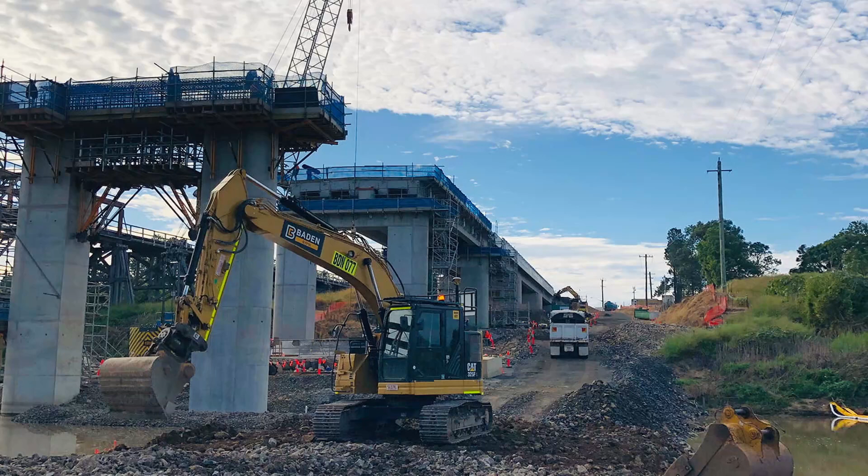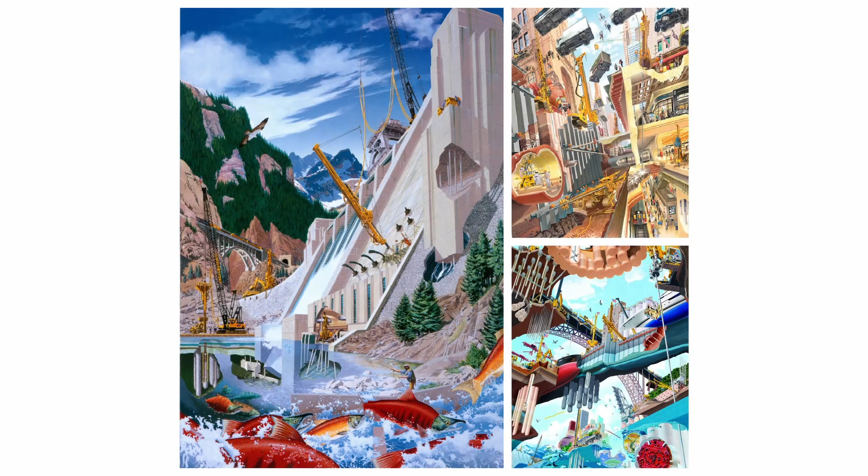As Terzaghi is said to have noted, there is no glory in foundations. Indeed, most of our work is buried. For example, everyone knows the Eiffel Tower in Paris, but very few know about its foundation.

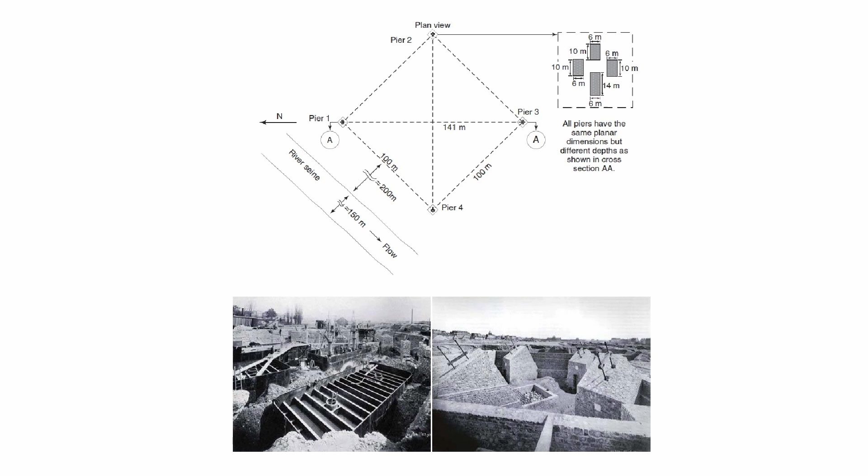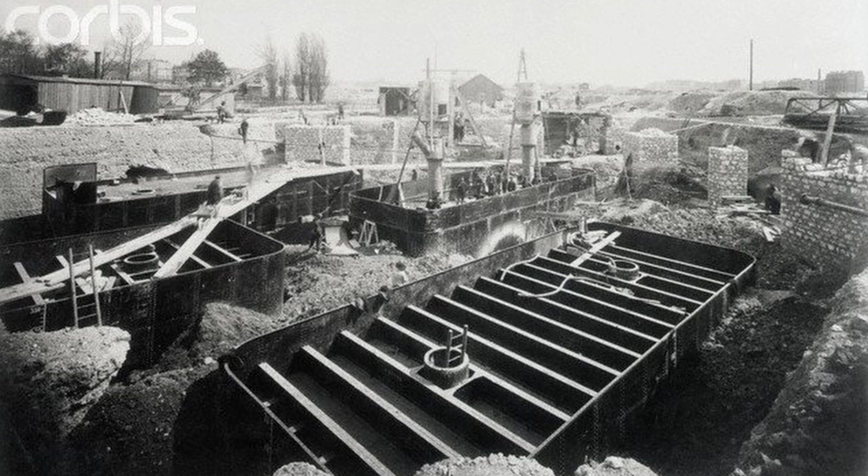The foundation was built by excavating down to the water level about 7 meters deep, but the soil at that depth was not strong enough to support the 100 meganewton weight of the tower, so digging continued. Because of the water coming from the River Seine, the deepening of the excavation had to be done using pressurized caissons, upside-down coffee cans, so that the air pressure could balance the water pressure and keep it out of the

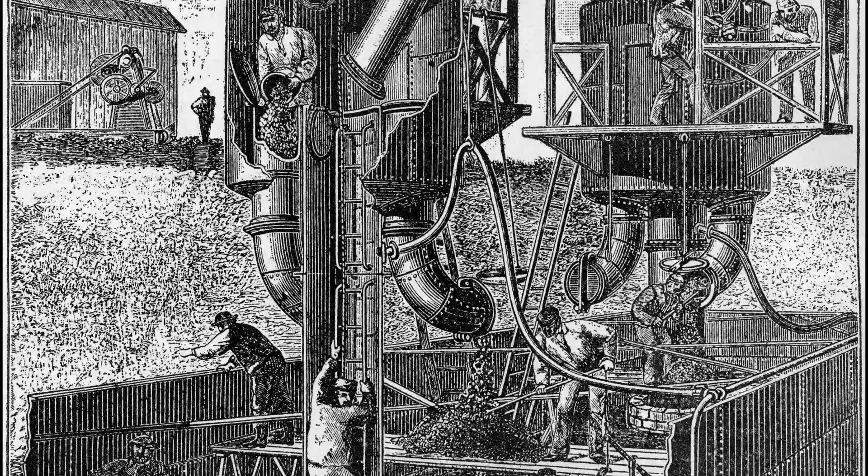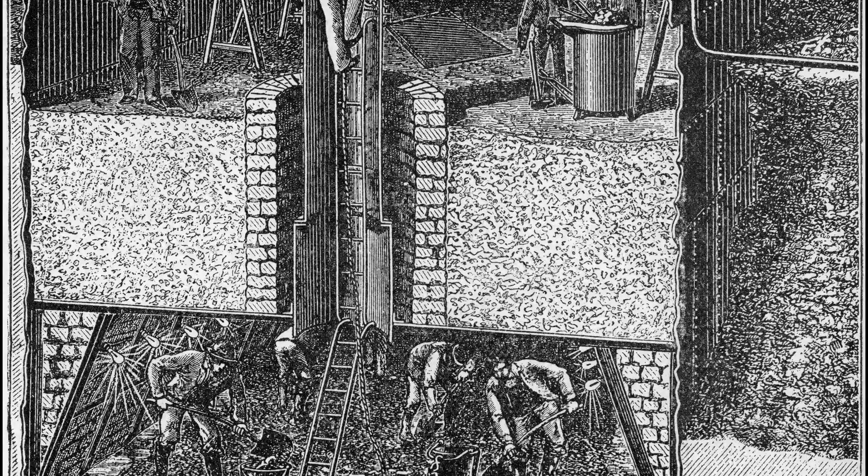excavation. Workers got into these 14 times 6 times 15 meters caissons and worked literally under pressure until they reached a depth where the soil was strong enough to support the tower, about 13 meters on the side closest to the river and about 8 meters on the side away from the river.

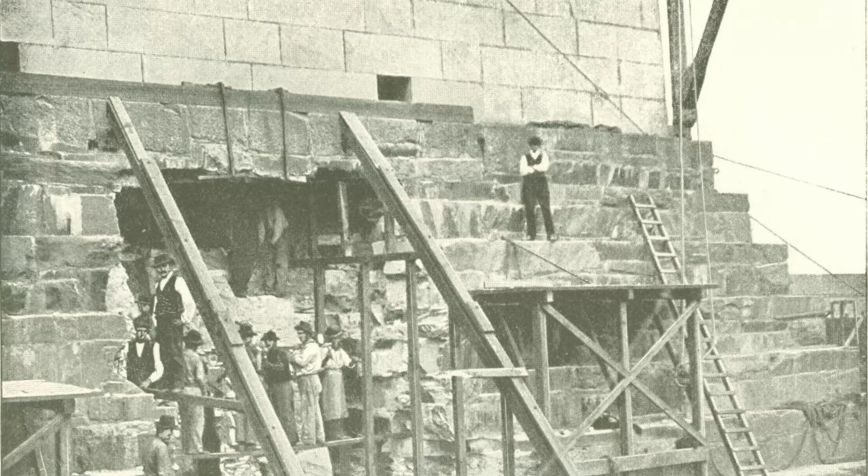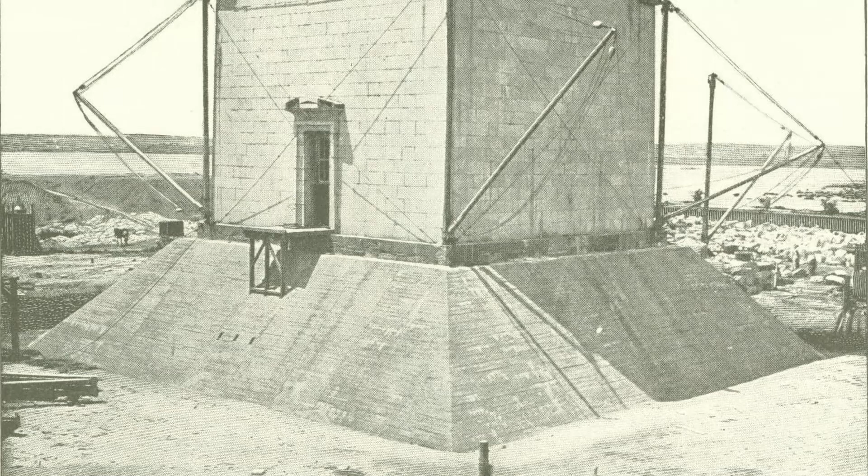Among some notable geotechnical engineering projects and developments are the underpinning of the foundation of the Washington Monument in 1878. The foundation blocks were set in a mixture of lime mortar and cement to form a stepped-up truncated pyramid 24.4 meters square at the base. The foundation extended 2.3 meters below ground and 4.8 meters above. However, it proved to be incapable of supporting the projected height and weight of the monument and was later modified when the project was completed by the Army engineers.

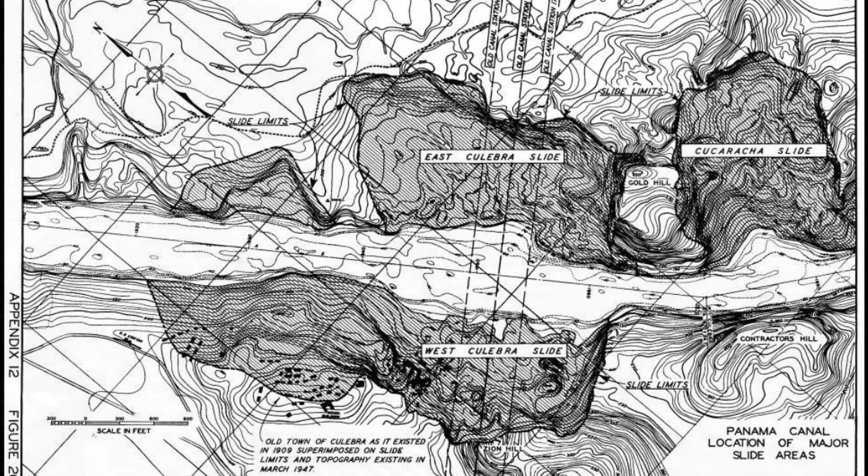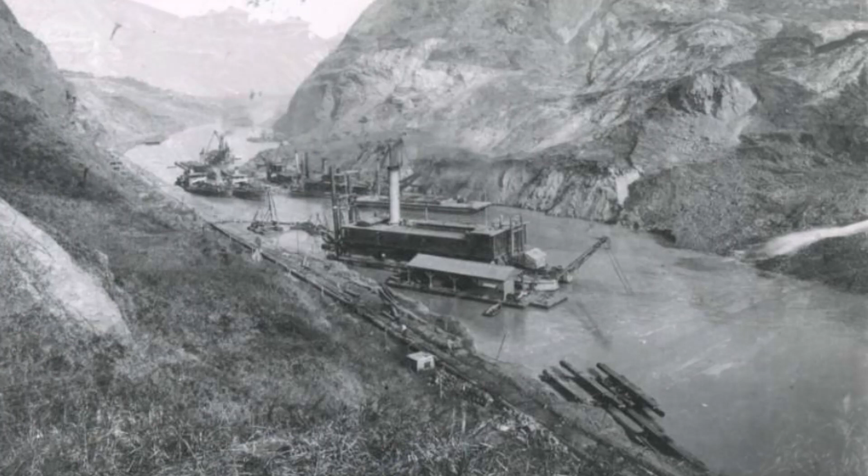The Panama Canal, 1913, and its slope stability problems. On August 15, 1914, the canal opened to shipping. Shortly afterward, the two largest landslides, called the East and West Culebra landslides, 13 and 10 million cubic meters in motion, respectively, slipped simultaneously. These landslides closed the canal for much of its second year of operation, while dredges worked to reopen the channel. Although landslides have not blocked the canal since 1920, they still threaten navigation.

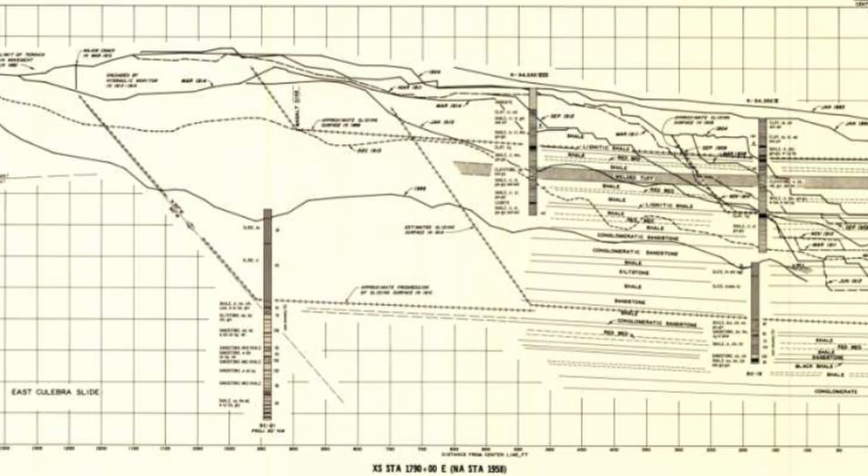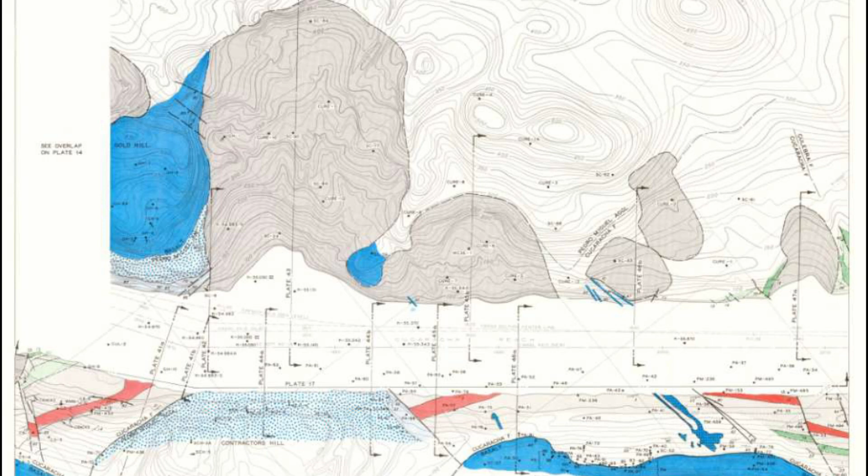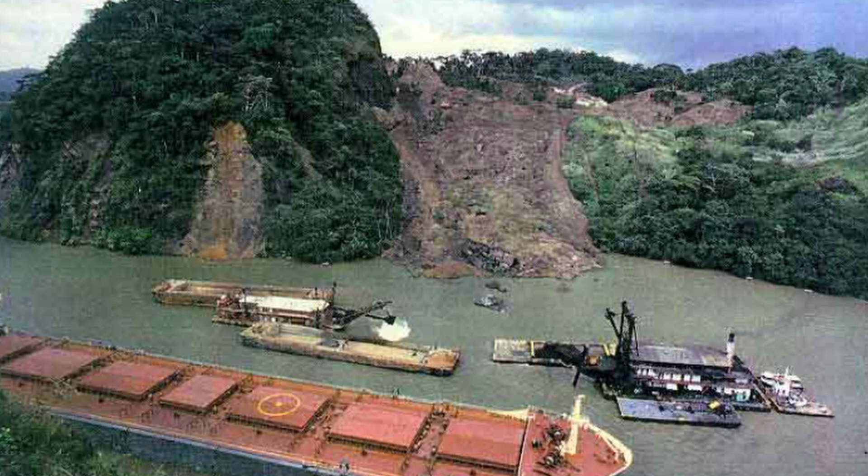They have partially obstructed it in 3 instances. Debris from the East Culebra Extension landslide, 2.4 million cubic meters in motion, restricted navigation in 1931 and 1974. The East Cucaracha landslide, 4.6 million cubic meters in motion, nearly closed the canal in 1986.

The Tower of Pisa, 1370, and its foundation repair in 1990. The monument began to lean in 1178 when the construction works were barely started. During the course of 800 years, the lean constantly increased, so much as to become a cause of concern by the end of the previous century.

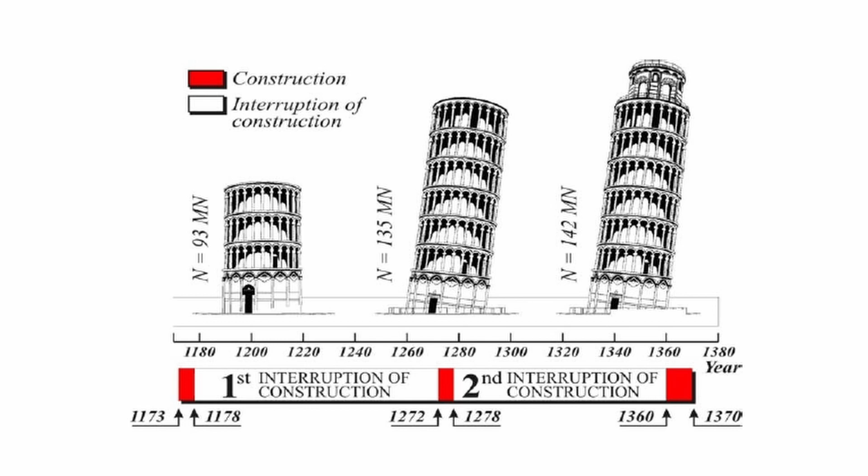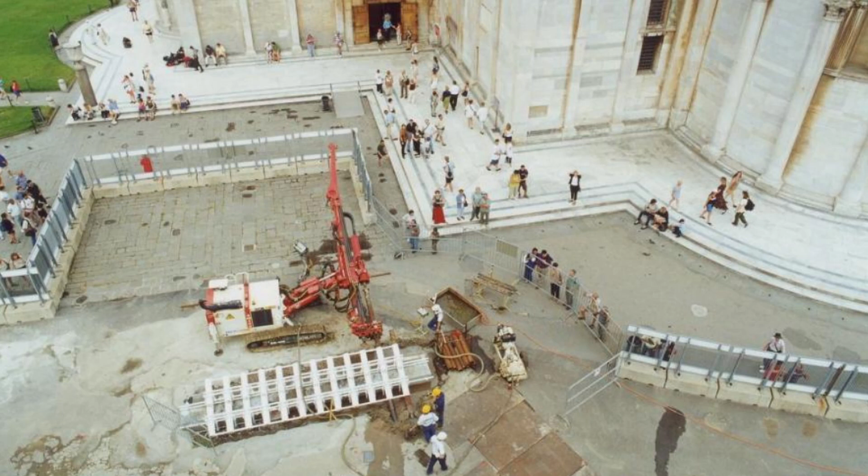The solution to this problem was then to reinforce the soil under the foundation and to make room for the tower to compress some of the soil and straighten back up towards the north. The tower leans to the south. They did this in the frame of a project launched in 1990. The project total cost was over 30 million euros, and it lasted 10 years.

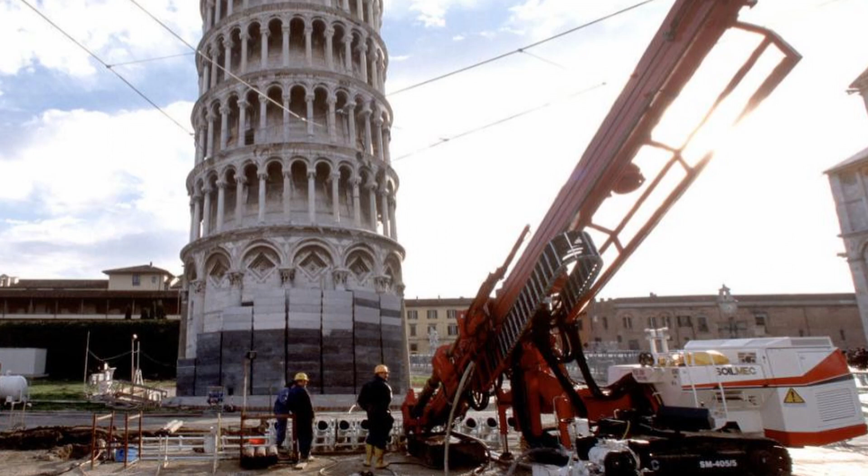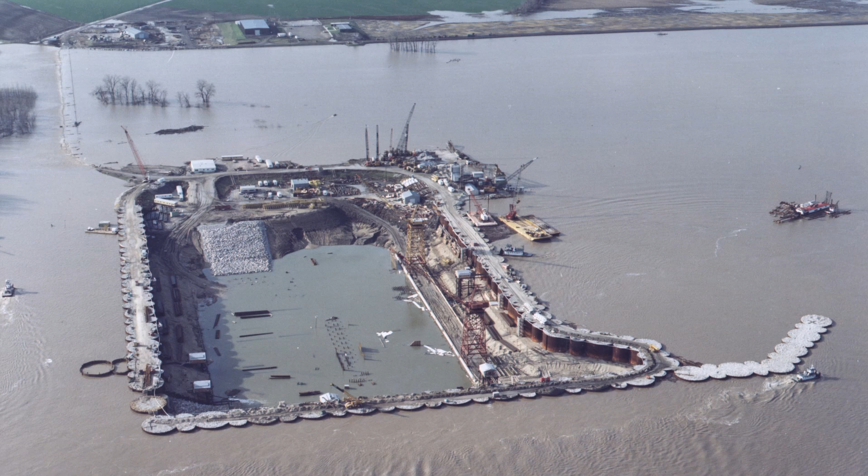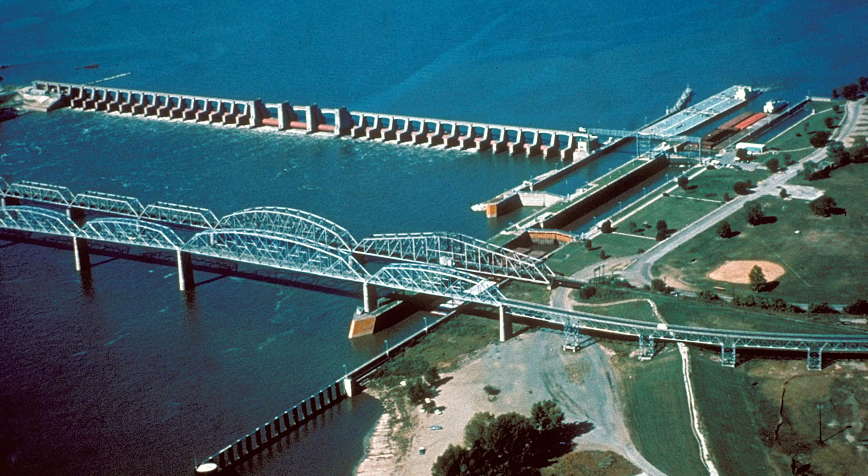The locks and dams on the Mississippi River in 1990 and their gigantic deep foundations. Construction began in 1979, the main lock opened in 1990, and the full structure was completed in 1994. It replaced the earlier lock and dam number 26, demolished in 1990, and is the first replacement structure on the Upper Mississippi River 9-foot navigation project.

The main lock is 370 meters long and 34 meters wide. The auxiliary is 180 meters long and 34 meters wide. The main lock has a vertical lift gate and a miter gate, while the auxiliary lock has 2 miter gates. The dam is 350 meters long, with 9 tainter gates, each 34 meters wide by 13 meters high.

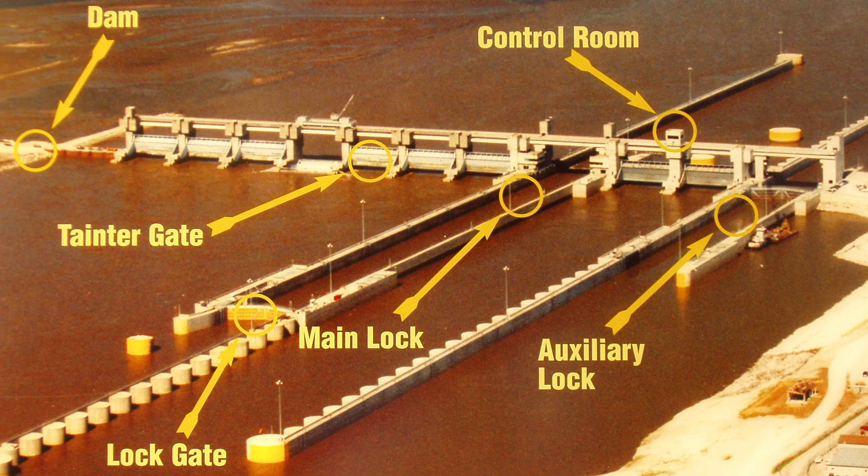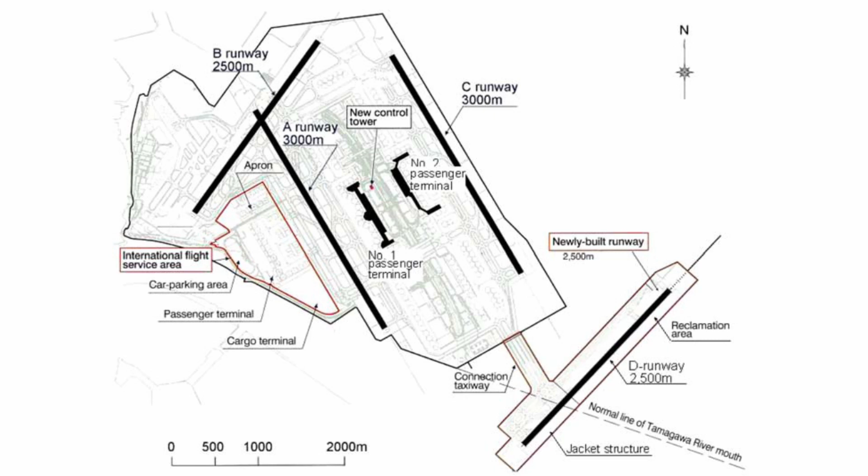Tokyo Haneda Airport runway extension in 2010. In August 2010, the 4th runway, called D runway, 2,500 meters long, was completed off the shore of the Tokyo International Airport, Haneda Airport. Since the D runway is situated at the mouth of the Tamagawa River, a hybrid structure combining a piled elevated platform and land reclamation was planned, so that it would not obstruct the flow of the

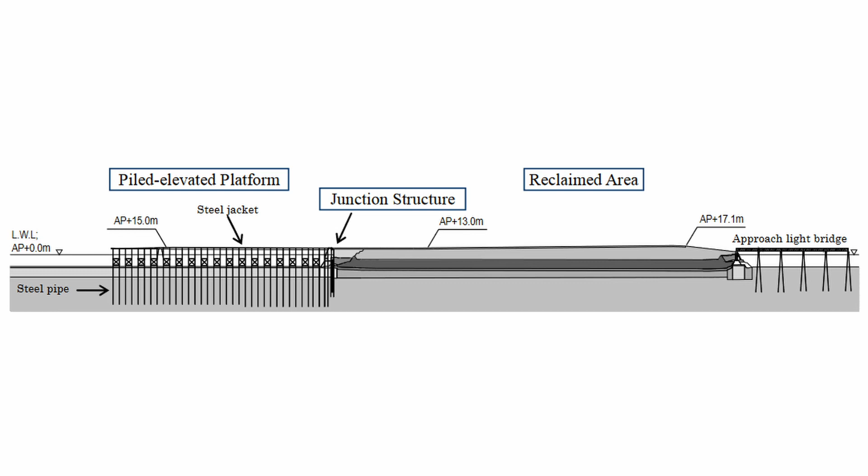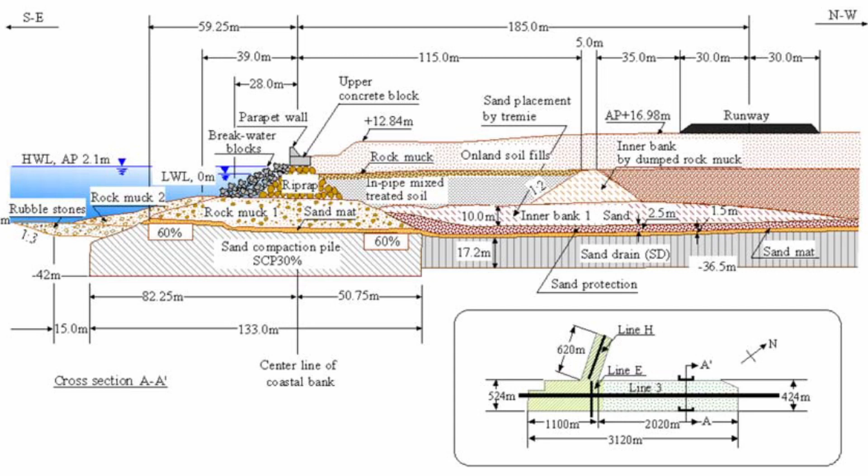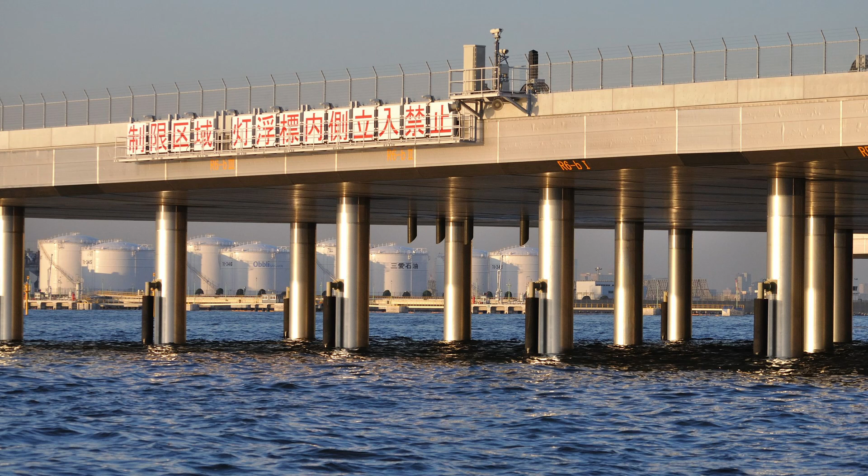river. In the reclamation area, a slope-type rubble mound seawall was constructed on the soft clay seabed, which was improved using the sand compaction pile method, with a total of 52 million cubic meters of soil, sand and rock used in the land reclamation. The piled elevated platform is a massive 520,000 square meter structure in which 198 prefabricated steel jackets supported by 1,165 steel pipe piles were connected together by welding on site.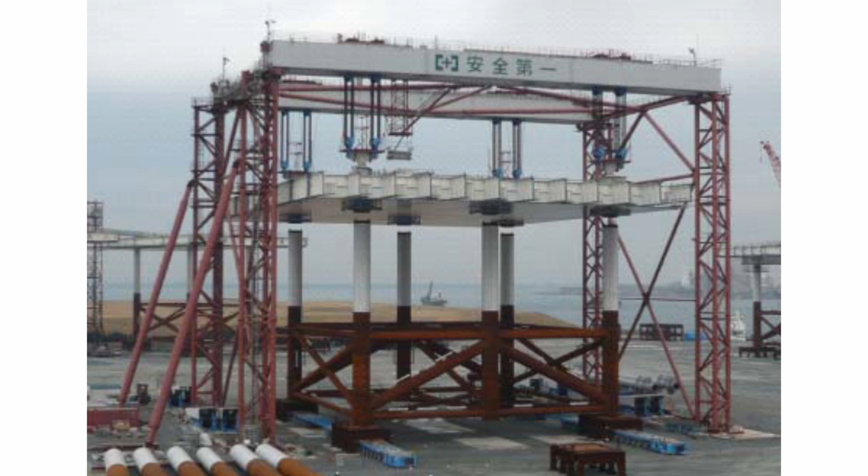This project required huge quantities of construction materials, including 470,000 tons of steel and 450,000 cubic meters of concrete. The D runway was successfully constructed in just 3.5 years, thanks to the rapid construction method and a continuous 24 hours a day work schedule.